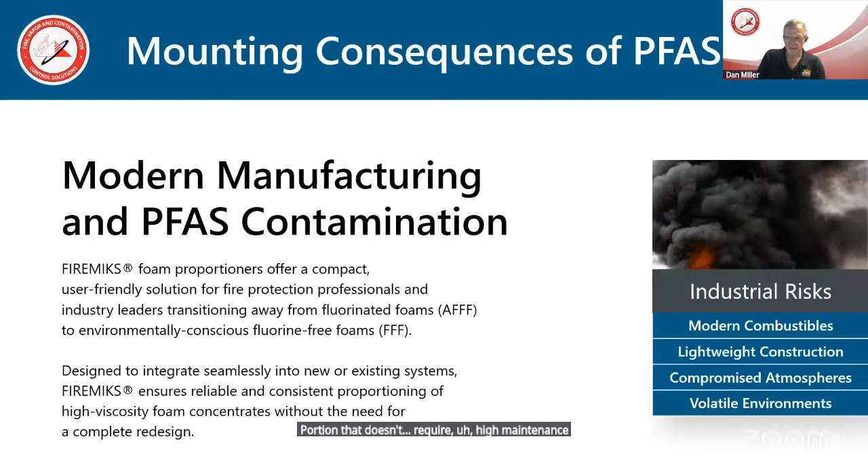You know, we can't eliminate the PFAS for you, so you have to work through that on your own from an engineering standpoint to eliminate any of that contamination. But when it comes to inserting a better proportioner into your system, a more reliable proportioner that doesn't require high maintenance or complicated maintenance, FIREMIKS is perfectly suited for that purpose.

So the mounting consequences of PFAS include environmental pollution and fines, either from accidental spillage or when it's actually applied to a fire. It's not helping the situation other than putting out the fire, because it's adding to the contamination. So everyone's moving towards fluorine-free products. There have been many class action lawsuits against almost every foam manufacturer in the world. And a lot of that's due to the compromised community health and mounting evidence that PFAS has really caused a lot of worldwide contamination, damage, health issues, et cetera.

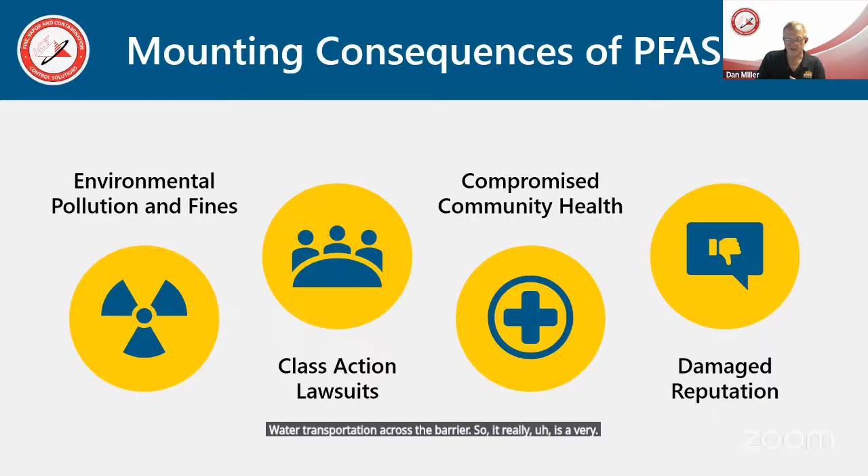PFASs are very pervasive. That's why they were intentionally added to products like AFFF, because it really helps that little bubble resist the chemicals that it's floating on, and it keeps those chemicals from breaking down that bubble. PFAS is also included in things like rainwear and turnout gear to resist water transportation across the barrier. So it really is a very effective chemical, but it causes contamination because it gets into the tissues in your body, gets into the soil, gets into the groundwater, and PFAS has been found all over the world, even in places where it's never been used before.

A PFAS contamination situation can really result in damaged reputation for the owners of the facility, managers of the facility, as well as fire protection contractors and engineers that are involved. So it really has to go at some point.

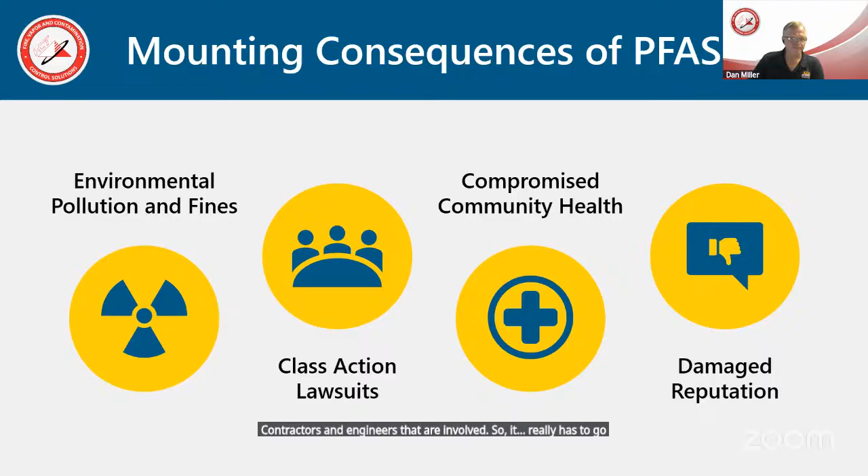Hey Dan, sorry to interrupt. Some of our viewers are just having a little trouble hearing you. If you could maybe adjust your headset a bit. Yeah, I'll give it a try. How's that? Is that better? Great, better. Thank you. Okay, very good. What little fraction can make a big difference.

So, according to recent test results by the EPA, there are over 9,000 sites in the U.S. contaminated with PFAS, and those sites span across all 50 states and all territories.

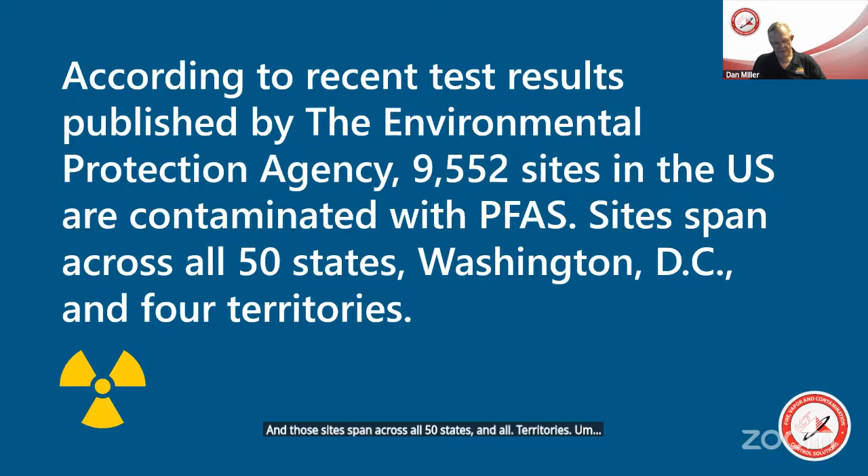I have 40 years in the fire service myself. We used to be encouraged to use all the foam we could during training, so we got good experience with it, and then we would scoop it up with our hands and pass it around and all kinds of stuff. So it was trusted, but we know better now that with the PFAS in legacy foam products, that's really not good for you, not good for the environment, and very, very hard to clean up because it's so pervasive and can absorb into so many materials, leach into ground, water, and then travel.

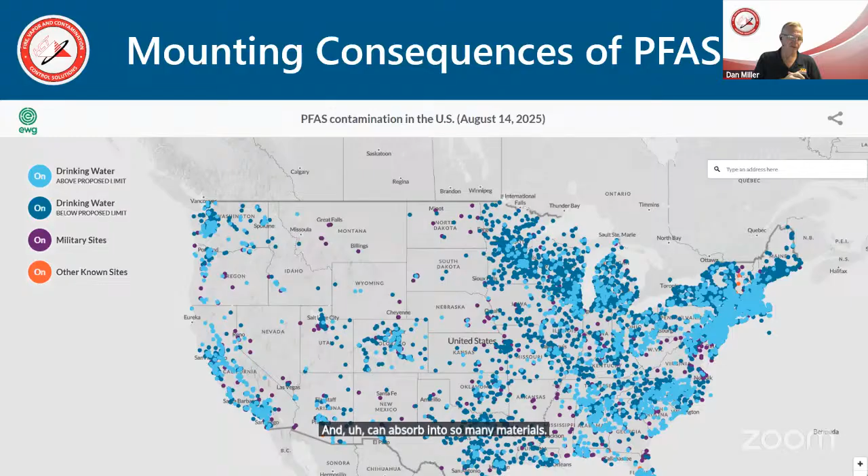So, looking at some key factors into safely switching to fluorine-free products, we have to look at the hazards themselves. So, fluorine-free foams can mitigate two-dimensional Class A or Class B fire hazards or help mitigate those. Looking at the hazards, looking at the appropriate products that are available on the market now in the more synthetic foams and the ones that don't contain PFAS, you have to make sure you're using a good foam that's compatible with it.

And along comes with that is differences in, drawing a blank here on my words, differences in the, I'm really drawing a blank on my word. In the viscosity, excuse me. Couldn't think of that word all of a sudden.

I apologize. In the viscosity of the various foams. So we have to make sure we're appropriately applying and using the right FIREMIKS proportioner, which we'll talk about here in a little bit. There are different fluorine-free foams. Some perform better, some perform worse, depending on the environment in which they're being used and the chemicals in which they're being used against. Their equipment, selecting the appropriate proportioning equipment is very important, and that's why we're here to help you with that today.

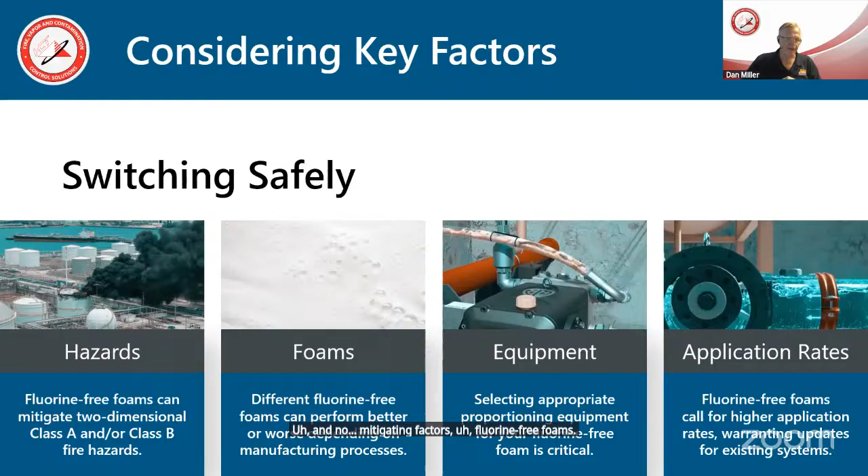And then application rates, just in general, from the studies that have been done, even in places where there was no wind, no rain, and no mitigating factors, fluorine-free foams require a higher rate of application in general. We'll talk about that a little bit.

So if we look at AFFF pre-2001, AFFF post-2001, and fluorine-free foams, or F3s as they're called, and look at some of the different factors involved here, like PFAS content. You had around 5,000 to 11,000 parts per million of PFAS in legacy AFFF. And then after 2001, they tried to switch to something called C6 foam away from C8. It's just a different fluorocarbon chain.

And that also contained PFAS, and they thought, well, this is going to be safer. Well, it turned out it wasn't very much safer and was just as pervasive. So they had to move away from that as well. But that had a lower level of PFAS in it, from 500 to 1,500 parts per million. And then the new fluorine-free foams that meet DoD specifications, Department of Defense specifications, contain less than 1/1000th of a part per million of fluorines, which is very easy to pick up even from the water that is used with that agent.

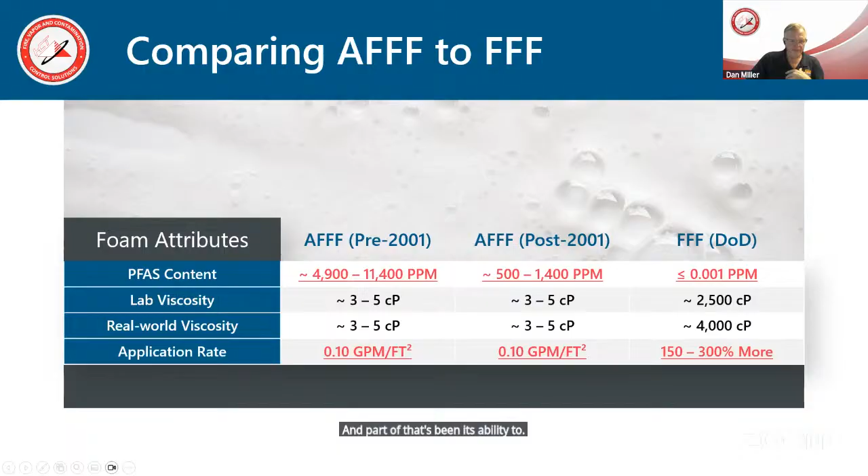The application rate for AFFFs pre and post 2001 was both at 0.10 gallons per minute per square foot on your typical hydrocarbons, but it's taking 150 to 300% more for the same results with the application of an F3 or a fluorine-free foam. And part of that's been its ability to hold down a high vapor pressure product. It really, really struggles with that.

So why method consistency matters. So all foam concentrates, AFFF can maybe sometimes be a little bit of both, non-Newtonian or Newtonian, but the alcohol resistant AFFF and the fluorine-free foams are all non-Newtonian. It means their viscosity is not fixed. It changes depending on temperature, what spindle you shear with, how fast you shear them. So it comes down to pourability and how even it pours out, how easy it pours, etc. How easy it flows through plumbing, how easy it can be proportioned, and how evenly it can be proportioned.

Because of those sensitivities, those viscosity values can't be compared in good faith unless they're measured under the same conditions. A lot of manufacturers, you'll see if you try to dig into the data, it really sometimes is obscure in their data how truly viscous their product is. So you really need to dig into that research and know that it's going to work for you.

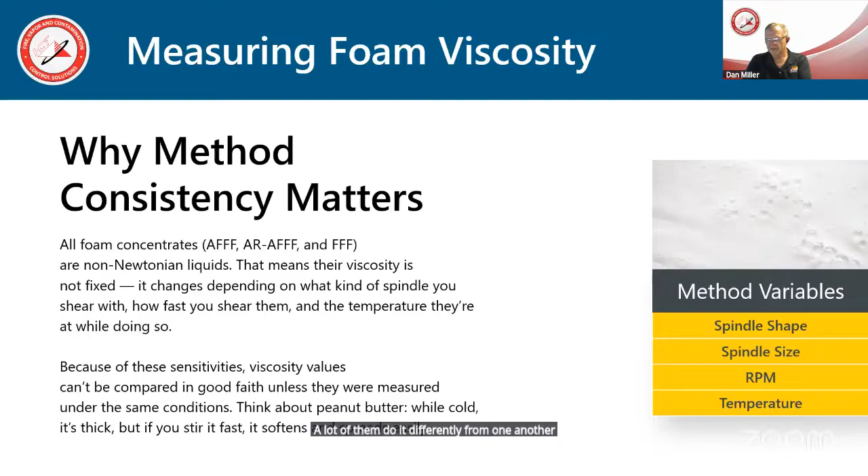There are different method variables in testing shear: spindle shape, spindle size, RPM, and temperature. A lot of them do it differently from one another, so it makes it hard to compare directly between the different products.

So if we look at lab versus real world, you can see on the chart on the right how AFFF stays near water viscosity in both the lab and the field. But when we take fluorine-free foams or F3s out into the field, they have a much higher viscosity. And then if there's a little bit of a temperature difference, especially if the temperature is dropping, getting colder, that viscosity goes way, way up.

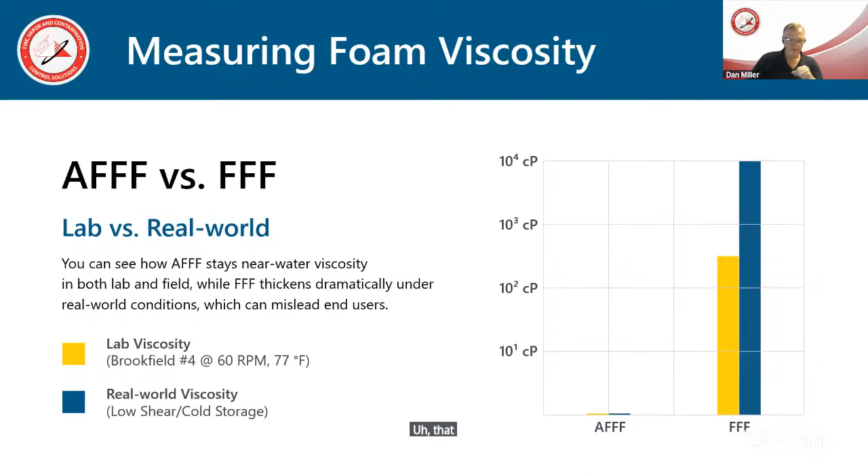So talk a little bit about proportioning systems here. Most of us are familiar with bladder tank systems. So bladder tank systems have a lot of, I would say, somewhat intricate parts, and those have to be maintained, inspected, tested, and that installation, use, maintenance, and testing can really add to the total cost of ownership of a bladder tank. But they can be used for high viscosity fluorine-free foams, but only typically with some pretty significant design changes that can result in quite a few expenses.

And then in most cases, what we've heard is that you cannot reuse a bladder tank because of the PFAS contamination in the previous bladder tank. It becomes really difficult to get that cleaned out. So using a fluorine-free foam in a bladder tank requires larger concentrate lines because of that higher viscosity, modified proportioners, ratio controllers, things like that.

High friction losses and reduced venturi suction can limit the accurate proportioning range and capability across those ranges of different flows that you're trying to achieve from the lower end of your system demand to the higher end. So it makes an expensive bladder tank even more expensive to maintain over time. And then when you do test a bladder tank, you're always going to have that waste material that is expensive to dispose of. And that adds to the total cost of ownership, just getting rid of that material.

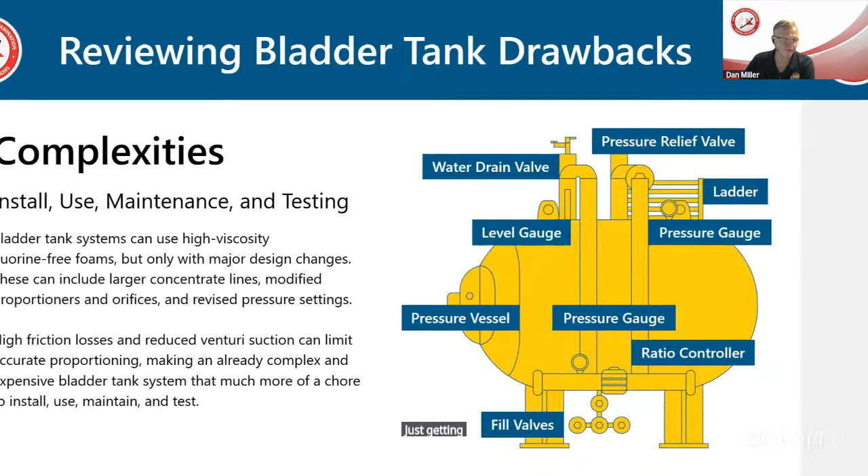What we've noticed as someone who directly does supply some bladder tanks is there's a rising cost in those bladder tanks due to the increased cost of steel, the bladders themselves, and the parts associated with them. They do have inconsistent proportioning with the higher viscosity materials, so that's a concern. There's a complex setup and maintenance, and it gets expensive just for that and the testing and the elimination of the waste material afterwards, the effluent.

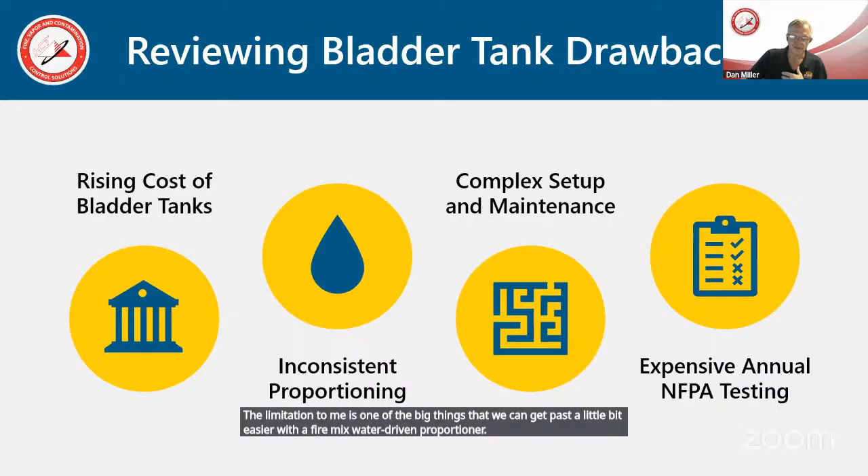And then the limitation to me is one of the big things that we can get past a little bit easier with a FIREMIKS water-driven proportioner for several reasons as we look at these water-driven proportioners and their benefits. Play a little video here on how a FIREMIKS water-driven proportioner functions in a system.

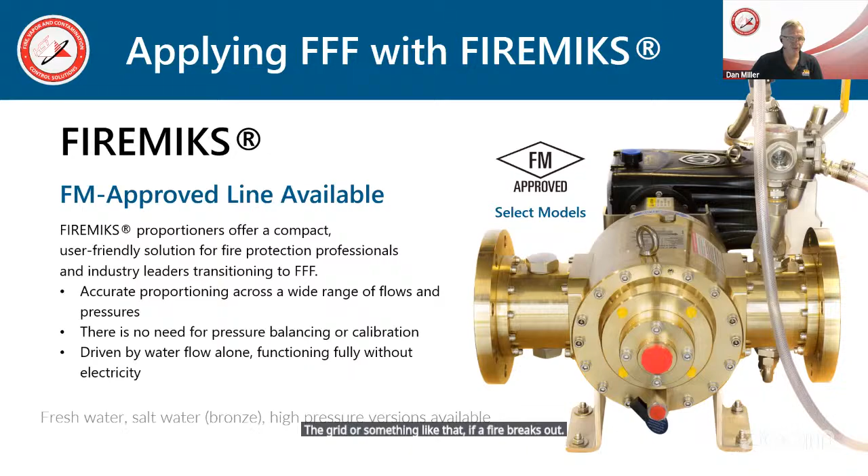So there's no need for pressure balancing. There's no concern about elevation beyond the proportioner, which there would be with the orifice-based stuff. It's really very, very simple. It's strictly RPM based. It's volumetric because of that. It's driven by water flow alone. So even if there's a power outage, some kind of damage to the grid or something like that, if a fire breaks out, the solution is still going to flow. There are several FM approved models in the line as well, which we'll show you here in a minute.

So these really, the water-driven proportioners help you protect facilities across a wide range of hazards and a wide range of situations with different hazard classes, from Class A to Class B, combustible dust situations, power plant situations, transformer protection, things like that. But your flammable liquids protection systems that are in place, we can match whatever the output needs are with either single diamond dosers or multiple diamond dosers side by side.

To increase sustainability, a switch to your fluorine-free foam to avoid contributing to that growing PFAS epidemic associated with AFFF, this is a great way to do that. It's very cost effective. One of the really nice things that I see about a water-driven proportioner like this, and having no defined quantity by just the bladder tank size alone, is you can back it up with a concentrate tank of whatever size you deem necessary based on the duration of flow.

But really, probably the least expensive part is having a bigger tank with a little bit more concentrate in it, 1.5 times, 2 times what you might need, and/or a reserve on site that you can then plug in and continue operations. It really makes that sustained attack very, very simple.

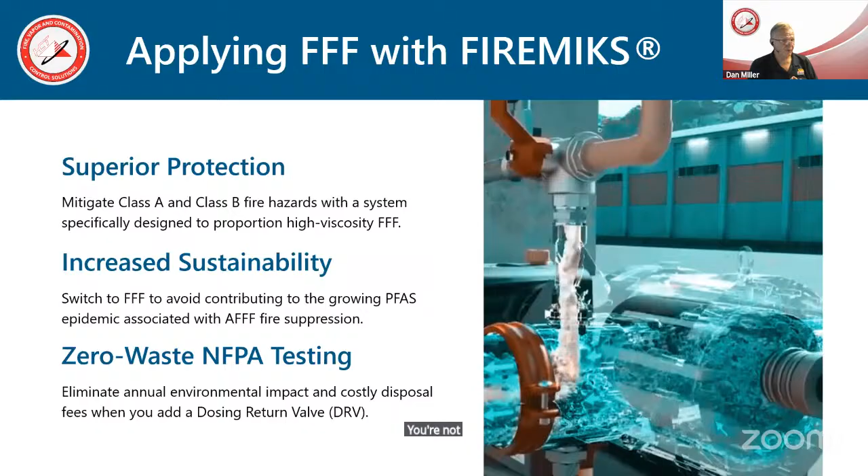And when it comes to testing, we have a zero waste testing process when you add a dosing return valve to the system, which we'll talk about in a minute. But the dosing return valve briefly just returns the concentrate back into the concentrate tank, so you're not wasting it onto the ground or into a bucket, never to be used again, and you don't have to dispose of it that way.

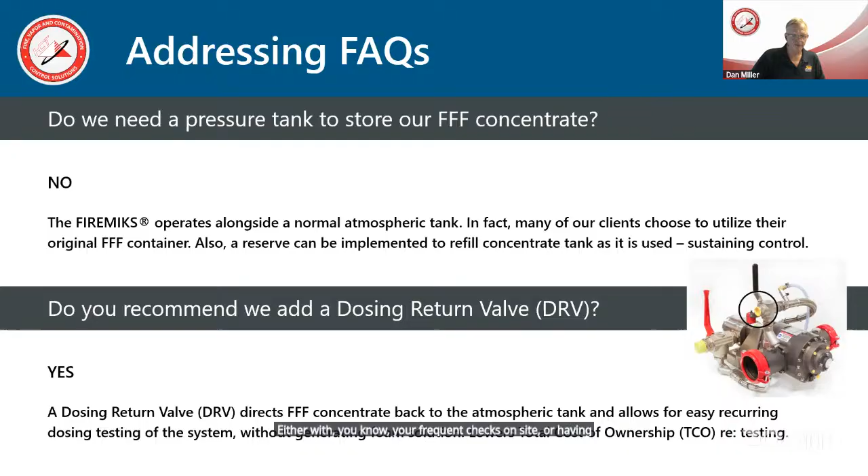There's nothing to refill. It makes it very, very simple for you to maintain, either with your frequent checks on site or having the fire protection contractor coming in and doing annual tests, for example.

Can you install a FIREMIKS pump into an existing fixed system? Absolutely. All we do is put a bypass in the riser, make sure we meet the minimum pipe length before and after the diamond doser so that you have good laminar flow of water through the diamond doser and not turbulence. It's a simple installation. It requires a little bit of room for the FIREMIKS water proportioner and the atmospheric tank, maybe 100 square feet for all of it put together, maybe a little bit more if you're going with a larger tank.

Can we install them in parallel? Yes, they can be installed in parallel. That way, you get more or less twice the maximum volume out of your water-driven proportioner as you would with a single one. And there are, of course, advantages to that, and disadvantages as far as it refers to laminar flow, harmonic pipe flow, lack of agitation, all those kind of good things as the product is flowing through it and the water is flowing through it.

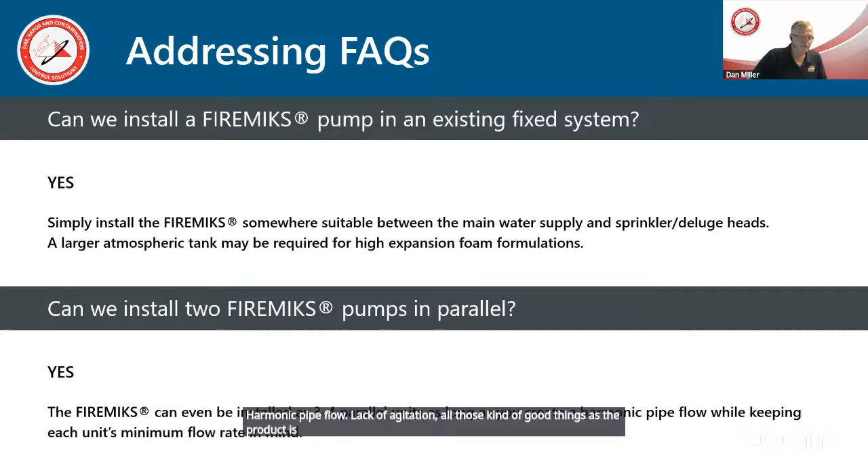So it's time for questions. Let's look at what we have here.

Heather, is there a separate Q&A button on this one or not? Yes, on the bottom toolbar. Oh, I see it. It's over here to the right a little bit further than I was looking. It was on one of those little 3-dot things.

What is the difference between this proportioner and FireDOS? And is your product FM approved? So we covered the FM approved models that we have. There are more pending. I'm going to refer that to Per or Michael. What would you say the biggest differences between the FIREMIKS and the FireDOS? Michael, or should I take it?

I would say one of the biggest differences is the design of the water motor. We call it a multi-vane motor. It consists of 4 or 5 overlapping vanes, which means that they have 8 or 10 contact points with the inner housing of the water motor. The FireDOS has 2 overlapping vanes, so they have 4 contact points. Our design, we believe, is more robust, and it spreads the load of the water flow onto more contact points, which gives a more robust solution. That's one of the main differences.

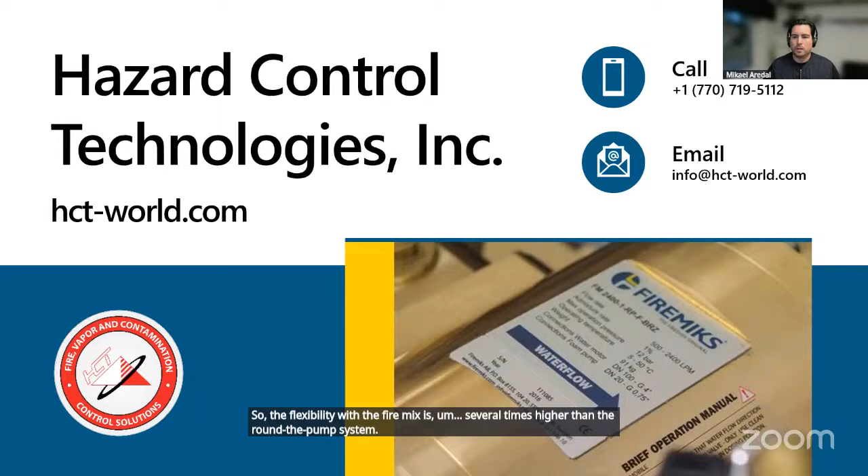And one advantage we see with the FIREMIKS is that it can be mobile, but it could be installed in the truck normally. But if the truck gets stuck, then you can take out the FIREMIKS and use it mobile. So the flexibility with the FIREMIKS is several times higher than the around the pump system. We call it the demountable model. So you can have a quick coupling on the inlets. A portable unit that's mounted more or less in a compartment, connected, but if you need to, disconnect it and take it out. Absolutely. So you have 2-in-1 in that case. Excellent. And we do have portable units available if you're strictly going to use them with hand lines. So absolutely.

Furthermore, it can be installed on trailers. That is something I personally like very much. You put it maybe on a 500 or 1,000 liter container, or you put an IBC container on a trailer and put a FIREMIKS. Right. And this trailer you can move around and put where you need it. In an industrial site, you don't have to build fixed systems everywhere. You can have just a piping system, and then you connect the trailer to where the fire is. So right, connect it right into the FDC of the building.

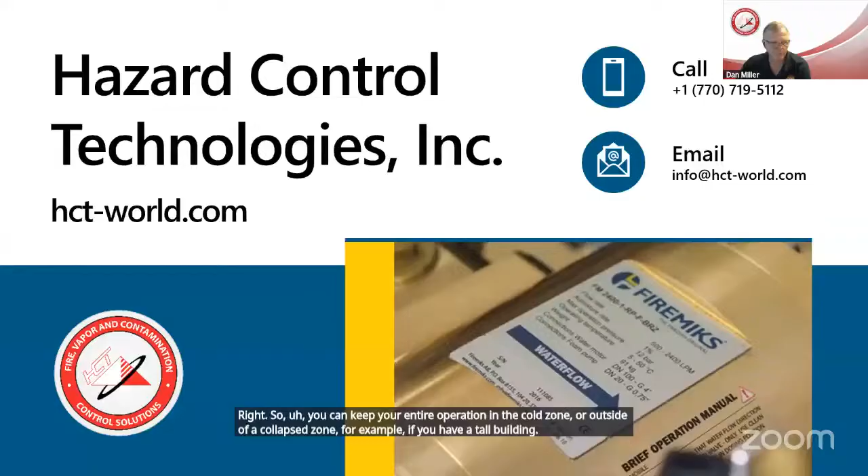Yeah, absolutely. The nice thing is, with these, again, we're not using eductors, so you're not worried about loss beyond the proportioner or height above. With an eductor, either of those makes proportioning not possible. So with one of these, as long as water is flowing, so is your solution. Yeah, exactly. So it could be 500 meters, it could be 2,000 meters, it could be 30 meters. It doesn't affect it; as long as the FIREMIKS rotates, it just keeps dosing. So you can keep your entire operation in the cold zone or outside of a collapse zone, for example, if you have a tall building, and still proportion agent into that building.

We had a question that did come up about the different units available. Are there going to be any FM units above 1,000 gallons per minute? I'll let Per answer that as well. What we have done, we cannot promise too much because FM takes their own decision, but we have passed the test for the 6,000 and 8,000 during the summer, the actual practical test. So we know that we have the right capacity. Now it takes 1, 2, 3 months maybe before we get the formal FM approval signed and stamped. But we are sure we will get it. Absolutely. Last time I spoke with the inspector, he said November. I hope he keeps it.

We have one small unit, 450 also. And all these are for 3%. But our goal is to also add the 1% and so on. So it will be a continuous process to add more and more FM approved, so we hopefully have, if not all, most of the standard lines FM approved. That is our goal.

Yes. All right. Next question from an anonymous attendee. Can you talk about pricing and installation issues? So pricing, we probably won't discuss here much, other than we know right now the price on these is less than a bladder tank, pretty much across the board for all the systems we've priced out in the last year and a half. It's less than a bladder tank, so it's really a good value. Installation-wise, we do business-to-business consulting with fire protection contractors and installers. And then we also come out and do the commissioning. So that's something that we price right into the supply.

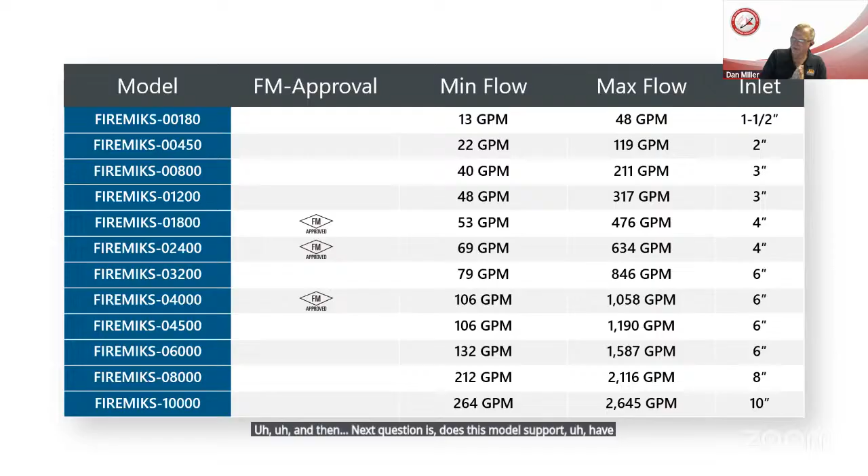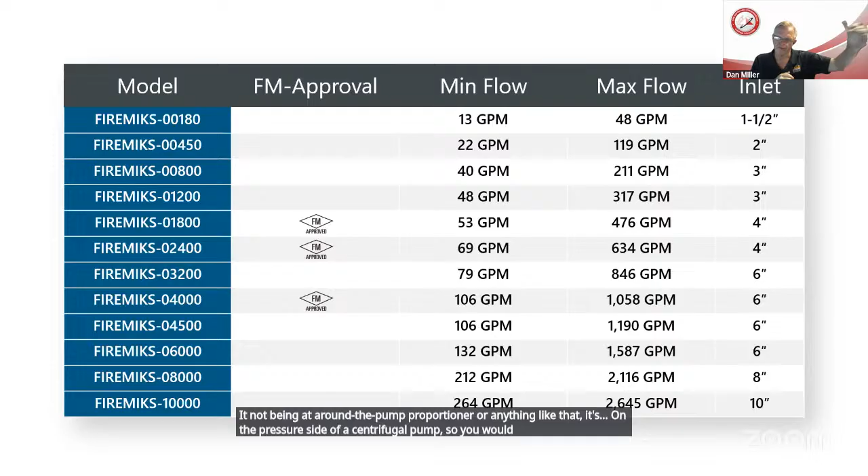And then next question is, does this model have support for a centrifugal pump? It's not an around-the-pump proportioner or anything like that; it's on the pressure side of a centrifugal pump. So you would be pushing water through it and then proportioning agent and solution onto your fire, or sprinkler system, whatever your situation is. So you're going to put your pump in line ahead of this unit.

Yeah, and it could be a hydrant. If you have 3-4 bar from a hydrant, it still works. It starts at around 2 bar; then you don't have very much throw length, but it starts to rotate. But the actual FIREMIKS works from 2 bar and up. So if you normally have a hydrant around 4 or 5 bar, then you get decent throw length, jet length, anyway. And for all the different sizes we have cut sheets available, so you can see your minimum and maximum pressures and flows, so that you're engineering the right unit into your system.

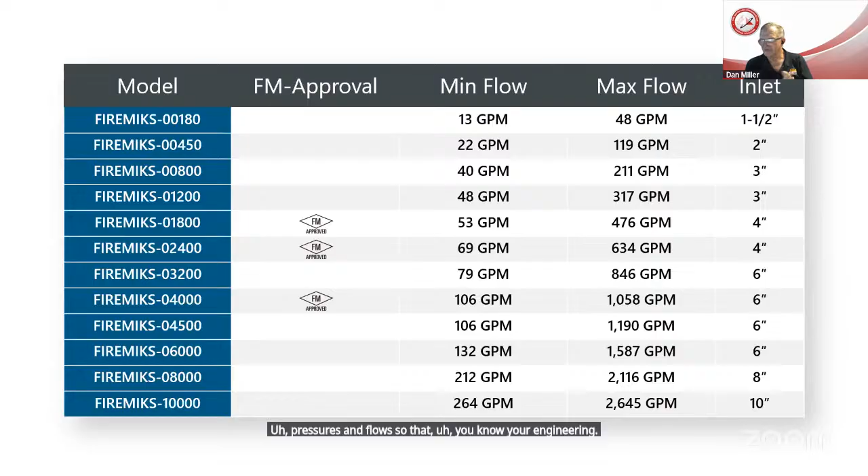There was a previous question regarding tank positioning. We always specify that the lowest point on the concentrate tank should be in line with the foam inlet of the FIREMIKS. That makes sure that you have gravity feed of the concentrate into the foam pump, and you don't have to really calculate the pressure head on the inlets. Just make sure that the concentrate is flowing, that you have a positive pressure on the inlet of the FIREMIKS.

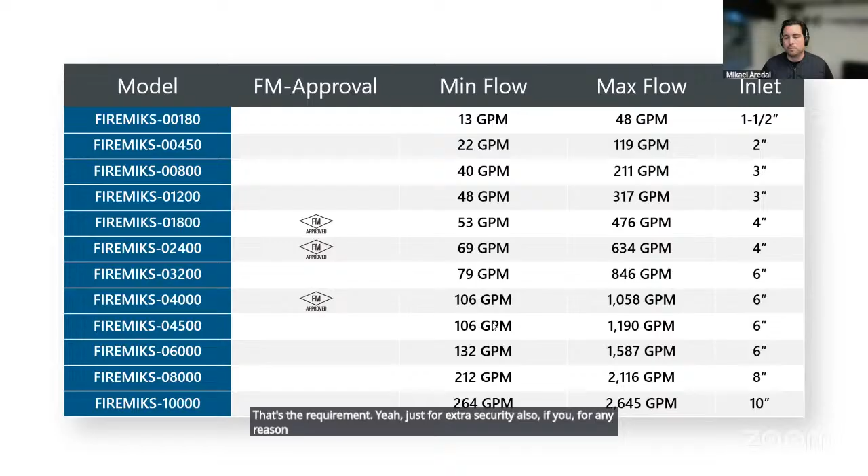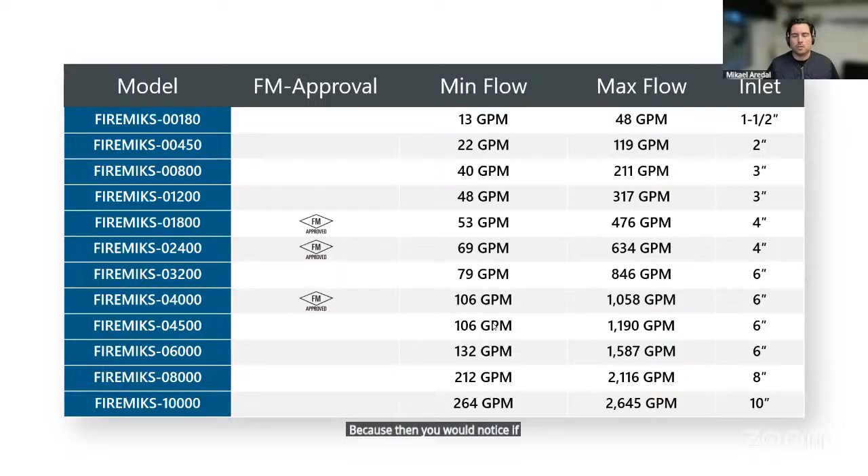Now, do you recommend that even on the Newtonian? Yeah, just for extra security, if for any reason you would have an air leakage or something. Air leakage. Good point. So it's always much more secure to have a gravity feed, because then you would notice if there would be any leakage on the suction line. So when we're working out proposals, go ahead.

That is absolutely, as Mikael said, what we say is mandatory for fixed installation, to make it 100% sure that it's always started with concentrate. If you are on a fire truck or if you use it mobile, then you can overlook it and you can help it by flushing the pump a little bit to get the suction.

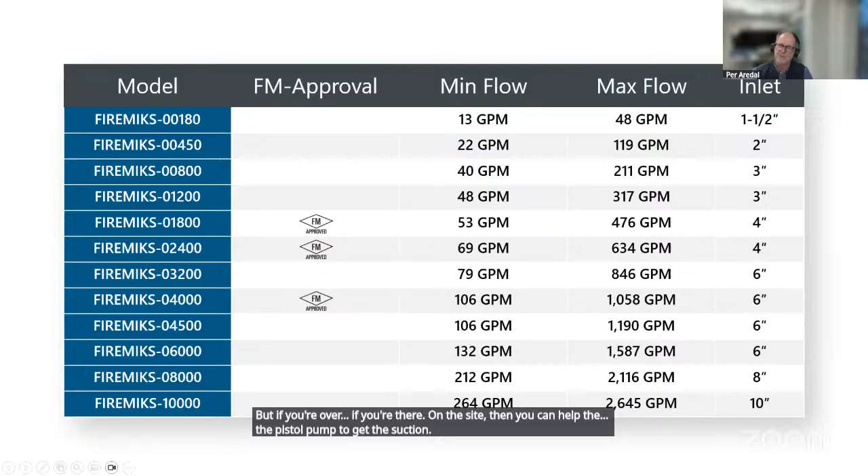So it's not mandatory if it's on a fire truck or if you use it mobile to have gravity feed, although it's beneficial. But if you're there on the site, then you can help the piston pump to get the suction just by flushing it a little bit in the flushing system. But for fixed system, absolutely gravity feed.

I'll stop sharing for a second so that I can show one of the cut sheets real quick, because I think that's going to help answer some questions here with friction loss and loss through the FIREMIKS as well. Pull up the right one.

I think I can in between. I saw a small question: is it suitable for foam sprinkler system? Absolutely, it works very well in a sprinkler system if you want to add foam, as long as you are within the min and max flow of the system.

All right. Do a little sharing again here. So if you can see my screen now, there we go.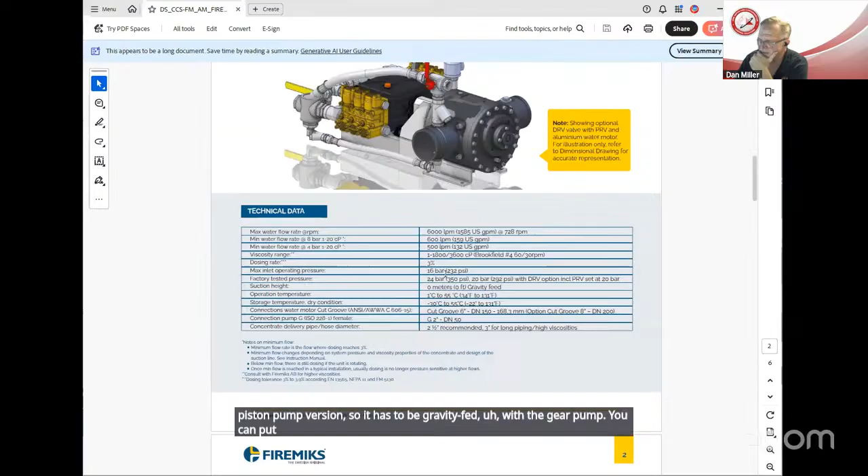Very good. Dosing rate is fixed at 3% for this unit. Max inlet operating pressure is 16 bar or 232 PSI. Factory tested pressure, it shows you that there. Suction height, this is a piston pump version, so it has to be gravity fed; with the gear pump you can put it lower, but it's not recommended. Gravity fed is still highly recommended.

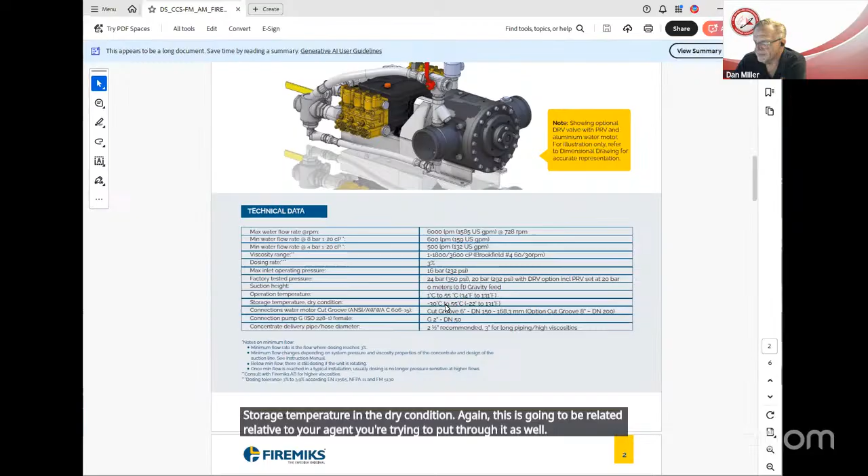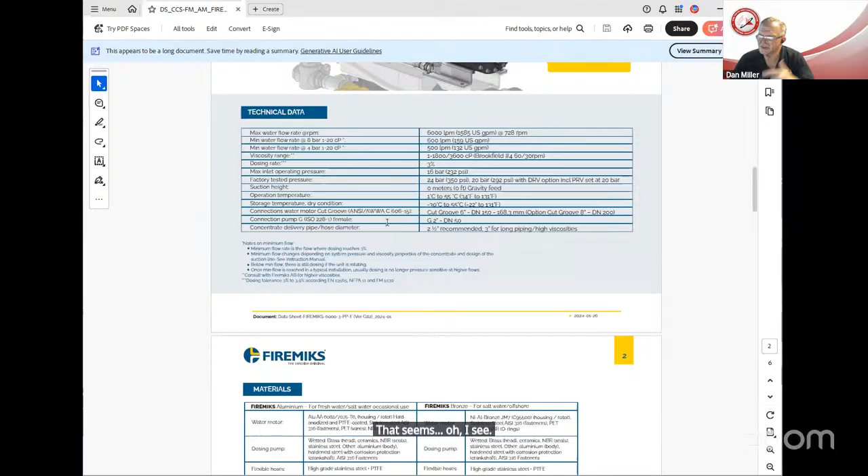Your connection to your pump is 2-inch or DN50. Concentrate delivery pipe hose diameter, 2.5, recommended 3-inch for long piping, high viscosities. Oh, I see, the inlet connection to the foam side. Okay, so down here, it's got your pressure loss table.

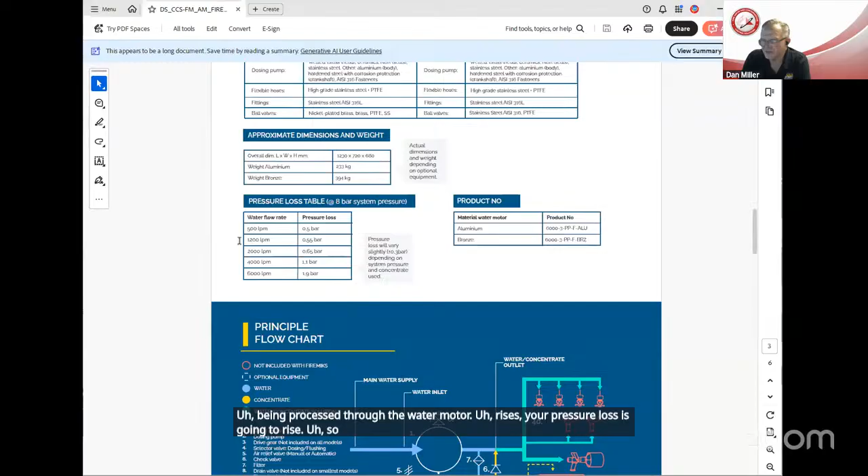So basically as the liters per minute of volume being processed through the water motor rises, your pressure loss is going to rise. So you can calculate that into your charts. Obviously, you're going to want to calculate for your highest flow, so that you know you're not losing too much pressure with this unit, or if you need to put in a fire pump or something like that, you can design off of this chart pretty easily.

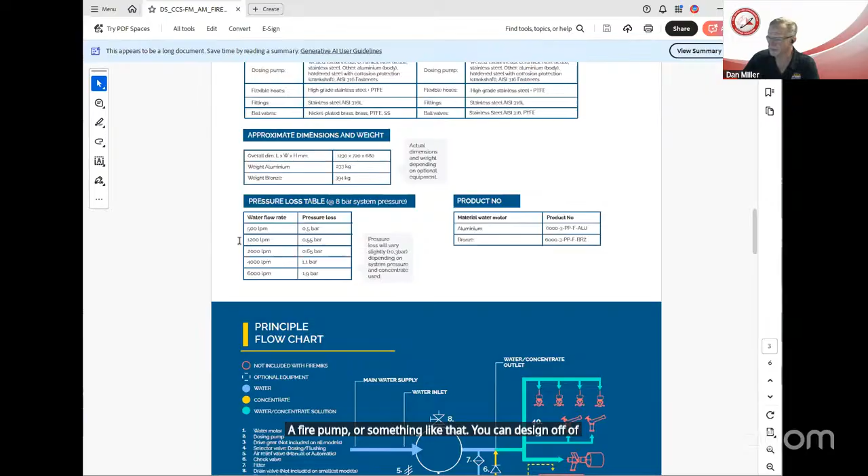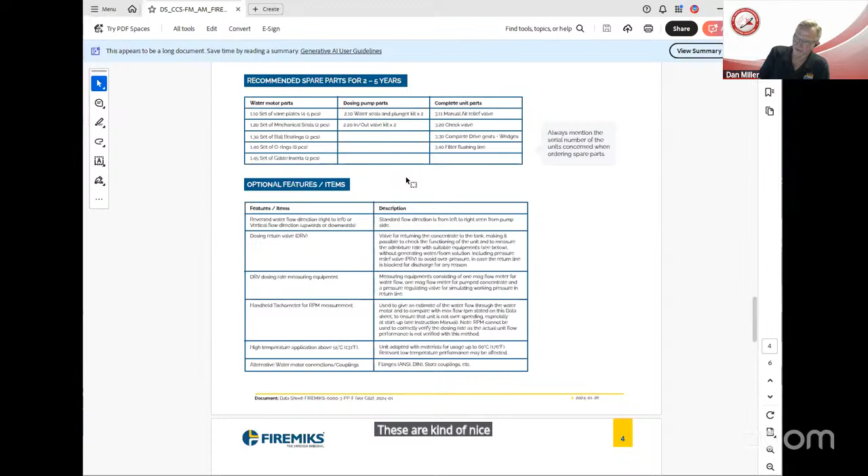You've got some optional parts and things to include up top, optional features and items down here, and recommended spare parts, and these are kind of nice if you want the ability to rebuild a pump on site in an emergency. Should there have been a failure, you can have the kit on site ready to rebuild that pump, and they're not too difficult to work with. They're fairly simple. Yeah, good that you show that.

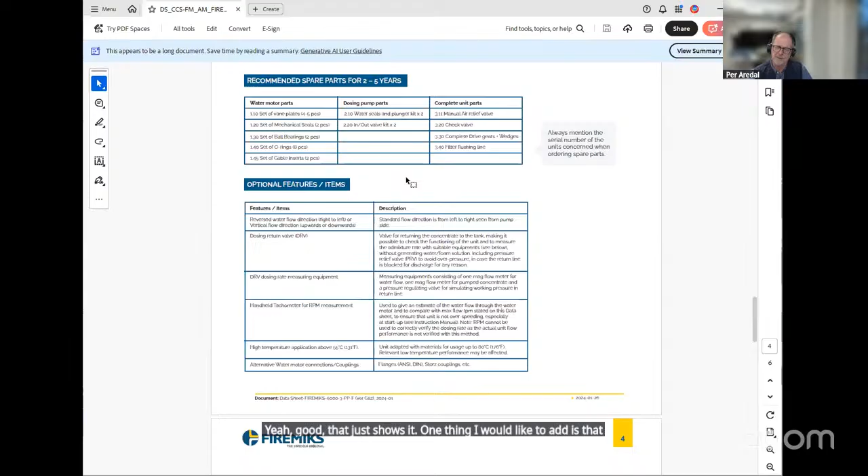One thing I would like to add regarding the min flow: the min flow is specified when we reach the 3% exactly. That means it's still working, let's say, for 200 liters per minute, or 300 or 400, but the dose rate will go up maybe from 1.5 to 2, 2.5, 2.8, 2.9, and 3% is when we have guarantee. The 600 and the 500 is when we reach the 3% threshold. But it still works, and it still doses far below this min flow. So it doesn't stop working at min flow. That's important to know also. Yeah, very important.

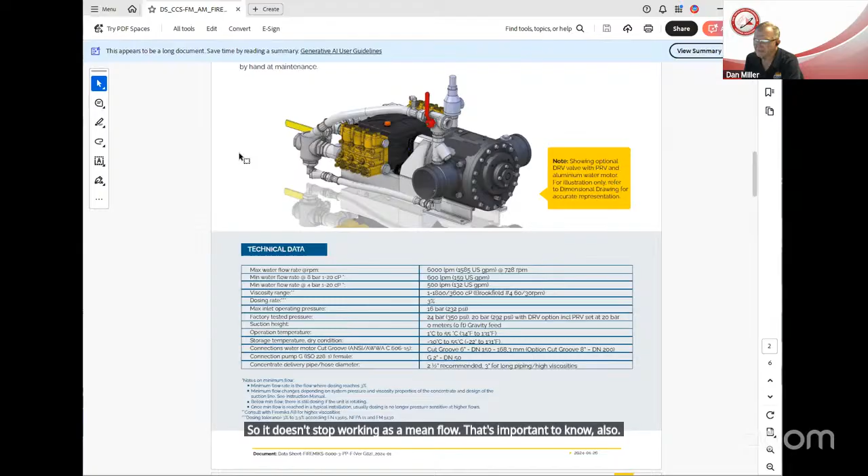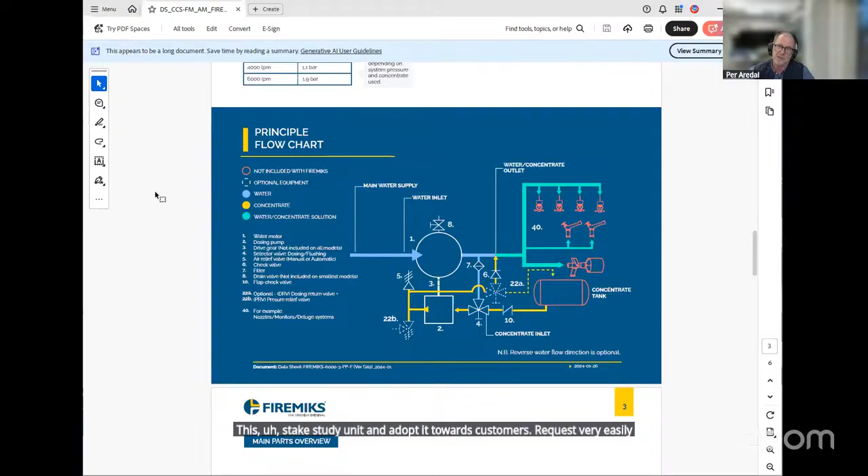Good information. Yes. So these are the standard units, and we could add or adjust. We do like to supply standard units, of course, but if someone said, okay, for us the min flow is very important, or the pressure drop is very important, then we can adjust this, take a standard unit and adapt it towards customers' requests very easily, because we machine each motor. So we have a flexible way of producing.

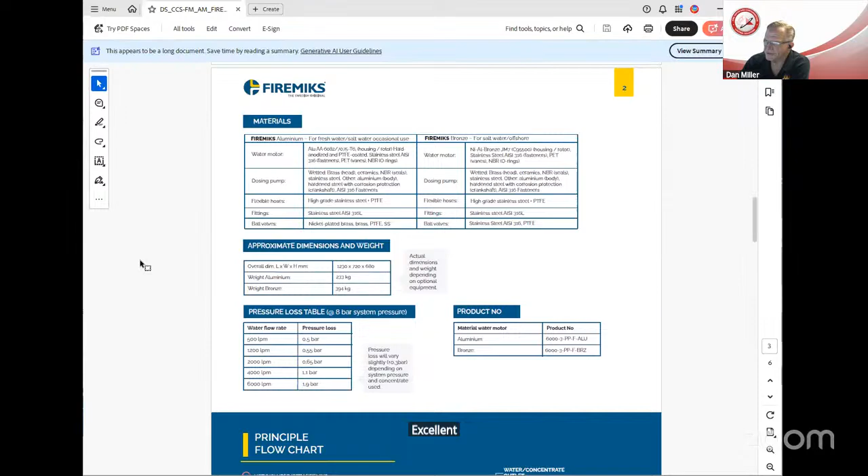Excellent. Good to know. Good to know. Mm-hmm. All right, let's see if we have any more questions. Just make sure we got them all. I believe we do have one more. I had to find the button now that I changed.

How many of these pumps have been installed in the US and Europe? Many. In US, not so many. Yeah, but we have delivered the Diamond Doser and branded quite a lot. You can give them the references you have on that one. In Europe, a couple of thousand around the world since we started. Yeah. So we have delivered to around 40 countries around the world.

Very good. Here in the US, I don't know if Mike's on or not, but I would say hundreds here in the US. So they're out there. They've been out there for a long time. They're very dependable. One thing we know, however, is that if you accidentally get some shop rags in the line and try to run it through the Diamond Doser, it doesn't work very well. So don't leave shop rags in the line.

So, okay. So, Mike Reiner just stepped in. He's president of HCT. He said upwards of 250 here in the US. So, okay. And so that was a short question last there, if it can be used with different types of nozzles, etc.